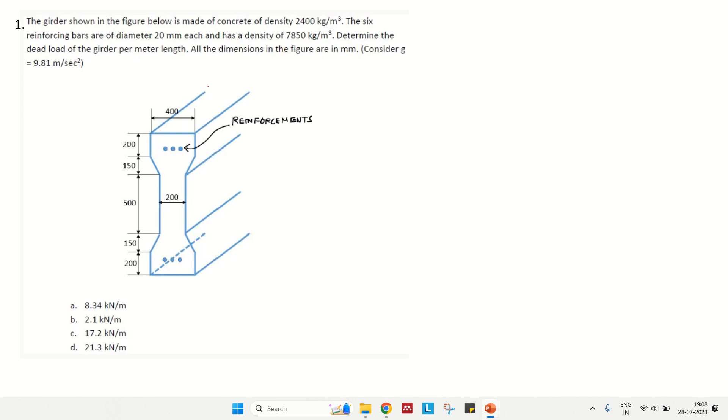We have a lot of loads, which we consider dead loads and live loads. One part of this is calculating what is the dead load applied. Dead load is obviously the self weight. One component is self weight, and another component is the load which permanently exists on the structure. Right now they are asking us to calculate the self weight of the beam.

The beam has six reinforcement bars, and it's an I section. So we just calculate the area multiplied by the unit length, since they are asking for per unit length. We'll calculate the area of this complete section, multiply it by 1. This is a basic level thing, so you can divide it into different parts, calculate the cross sectional area, multiply it with 1 meter, and volume multiplied by density will give the weight.

We also have two different components. One is the concrete, this is the concrete component, and we have the steel component. For the steel, they have defined what is the diameter of the bars.

Let us go ahead and start working on this. This rectangle part I'll mark it as 1. This trapezoidal part I'll mark it as 2. This complete rectangle part I'll mark it as 3, and this is 4, and this is 5.

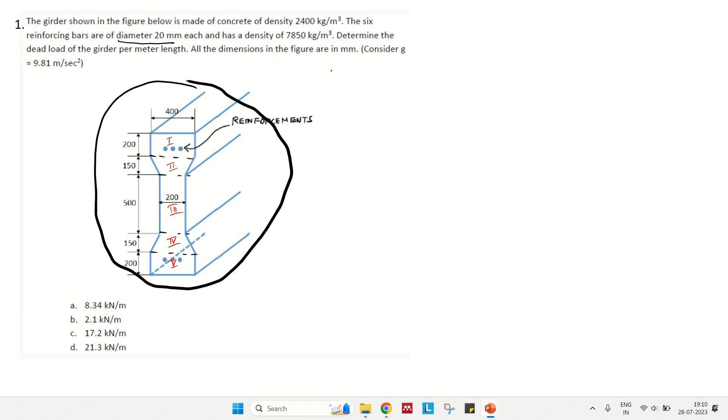Let us say the reinforcing bars, we can calculate the volume and then weight of the reinforcement bars. So let us calculate the dead load of the reinforcement bars. Can someone calculate the area and tell me what is the complete area of the reinforcement bars?

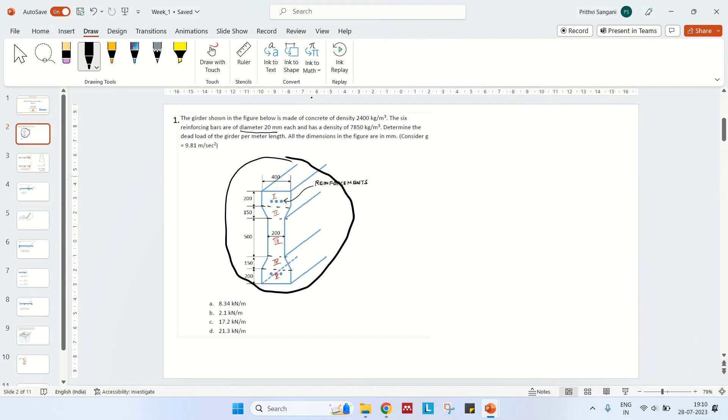How many bars do we have? We have 3 bars on the top, bottom reinforcement is 3, so we have 6 bars total. The area of cross section is pi by 4 into d square, and they're asking us to calculate per meter length. So let us say I'm taking it as 1000 mm. I want to calculate everything in terms of mm, then convert into the metric system: 6 into pi by 4 into 20 square into 1000.

This gives us the volume. If someone already calculated, they can tell me the value, if not I'll also calculate. Did anyone get the answer? This is what I got, can anyone confirm whether this is correct or not? Thank you, so this is the volume.

We need the weight, so weight is density of steel multiplied by volume. This is in mm cube, so now I'll convert into meter cube. 10 to the power how much? It's 10 to the power 9, because millimeters are 10 to the power minus 3 meters, and 10 to the power minus 3 whole to the power 3 gives 10 to the power minus 9. This multiplied by the density, which is given as 7850.

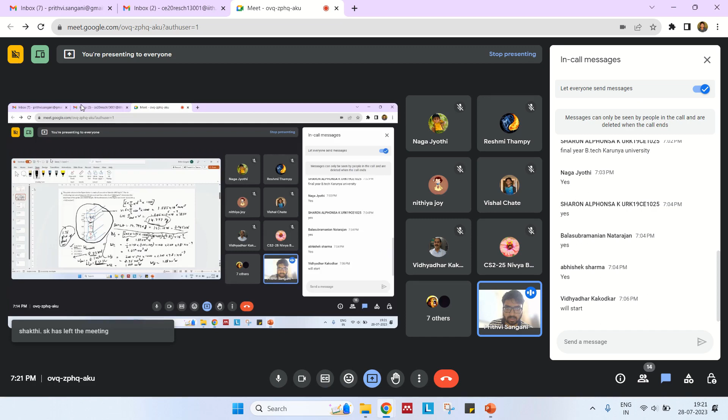So I hope the problem one is clear for all. You can just say yes, or you can message okay or yes, something like that. If you have some doubts, you can just tell me.

Can anyone respond, or shall we go to the next problem? Okay, yeah, thank you. Oh sure, thanks.

This is a basic one. I just took this problem to understand the different types of loads coming onto the structure. This is one part of a dead load. We also have live loads, wind loads, earthquake loads, snow loads, impact loading, and so on. This is the most common type when we design a structure. Dead loads - civil structures are usually heavily built, so dead loads make up a very high proportion of the total load.

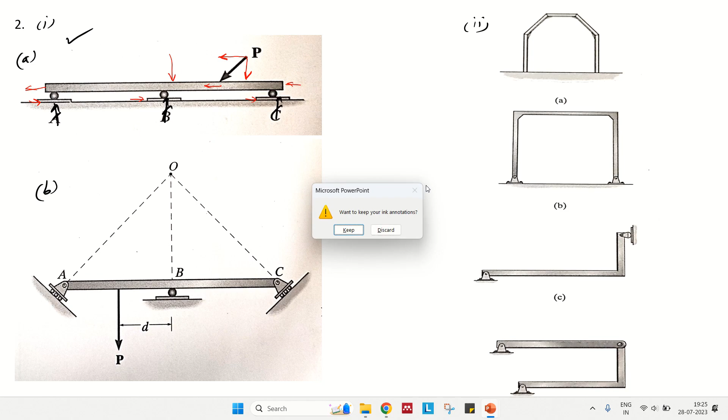But in this case, it is not like that, right? If you are loading in this direction, then it is fine. But what if you are not loading in that direction? If you're loading in the horizontal direction, then it is gone - someone just joined, sorry - so if you are loading in the horizontal direction, that means it just moves off. So this is an unstable system.

This is an unstable system. Now with this type of loading, you can see again this is a roller here - this is a roller support, again a roller support, and this is a roller support. So what does the roller support actually have? It can't move in this direction, so it will resist - you will have a resistant force coming here. It can't move in this direction, but in this direction it can move, though it can't move in the downward direction. So when you are restraining its movement or deformation in some direction, there you will have resistive forces - that is how the reactions generate. And for example, it can move in this direction, so if you just push it, it will just go in this direction.

You will not have any resistance coming from this direction. But if you are trying to push this in this direction, then you'll have a resistance. It will not move, and it will give some resistance, right? So now what I'll do is, we'll have this direction, this is the direction, and this is the other direction.

So what do you mean? For example, when do you call that the system is in equilibrium? We can call the system in equilibrium when we have forces balanced in all directions. Let us say x force is 0, forces in y direction 0, forces in z direction 0. For example, if the forces are not 0.

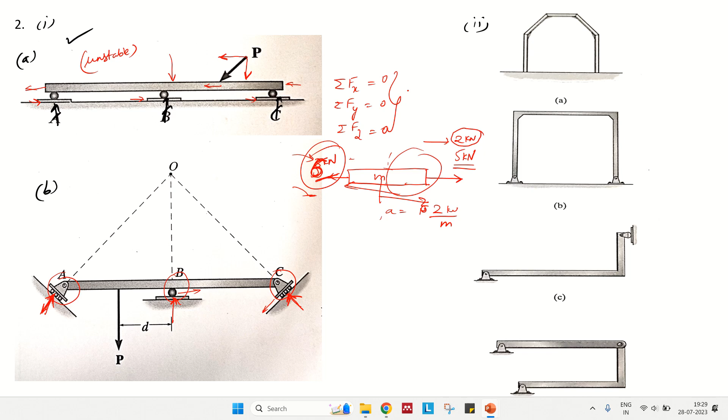In this, it is only about the summation of the forces being equal to 0. And also we should have the summation of moments equal to 0. So let us say why the summation of the moment should be 0.

Let us say I have a pen, or let us just take the fan itself - this is the wings of the fan. So I'm just pulling this, or rotating it in this direction. What happens? It will just keep rotating. It will keep rotating.

So what if I have a fixed support? I'll just hold this pen like this, and then do this. Now because of this fixity, it will not rotate, right? It will actually have some reaction coming here.

So for every system, you should always have this satisfying: summation of moments, and summation of forces, should be 0, irrespective of whatever you are doing, for the stable system - I'm talking about the stable system. So let us say this system has this vertical component, this inclined component, and this other inclined component. So I have some load passing like this, or maybe a point load somewhere here.

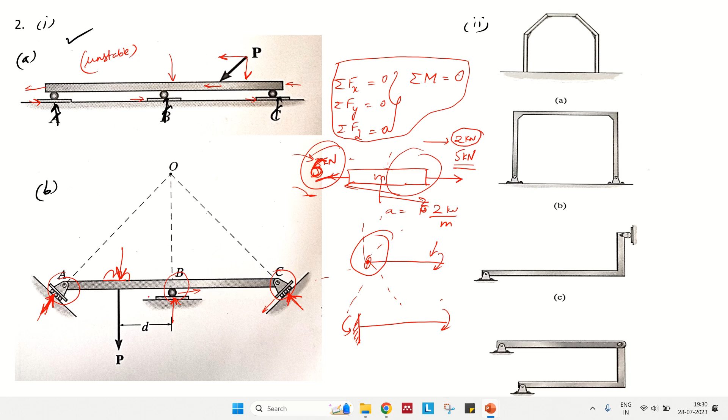So what I'll do is, irrespective of the position, usually we have a habit of taking moment about A0, moment about B0, or moment about C0. But that is for the easiness of our problems, right? So what I'll do is I'll take some moment where all these three intersect.

Let us take this point, okay? For the system, like I said, for the stable system, at any point you are considering all these things, summation of forces and summation of moments, that should be 0. So I'll take this random point, but that random point now seems to be an intersection where all these forces are concurrent - that means it is intersecting at that point. So let us say at this point, will our moments be 0?

Because of this load, let us say this is P load, I'll generate some reaction here R1, some reaction here R2, some reaction here R3. So at this point, what is the complete total moment? This R1 is going actually here, so there is no lever arm, right? So R1 into 0.

So here it is 0, R2 into 0, R3 into 0. But let us say my load here is P at a distance D from O. So you have P into D, summation of moments is equal to P into D plus R1 into 0 plus R2 into 0 plus R3 into 0. So that is PD. It is not equal to 0.

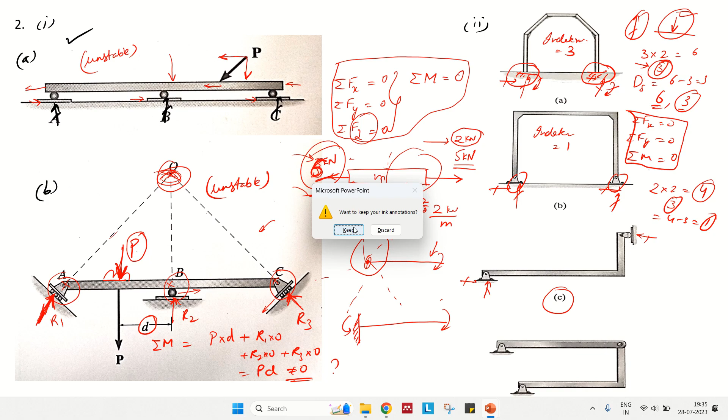Is this indeterminate or determinate? This one, see. Maybe someone can answer. Yeah, okay, I'll just explain, even I used to get confused about this.

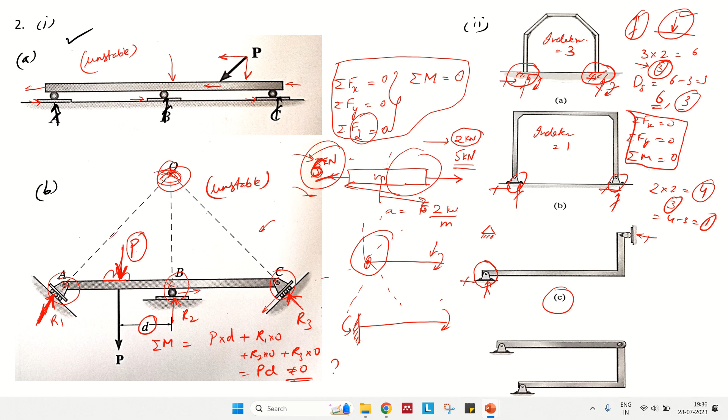So you can see this is actually a pin support. Okay, this is a pin. We usually represent a pin support like this. So this is similar, this is something which is similar. But here this is actually something different, this is actually a roller support. So this is what we usually denote it as.

So now you can say this is a roller support and this is a pin support. So we have 2 and we have 1, so we have 3 unknown reactions, and we have 3 equations. So degree of static determinacy is 3 minus 3, that is 0. So this is determinate.

Again, here you can see this is a pin support. You have a hinge here, and at the hinge there is a release, right? At the hinge we'll have an extra equation of equilibrium. So at the hinge, the total moments about the hinge is 0, because the hinge will only take the shear forces, not the moments.

So it is like this, for example, you can see here. Let us say this is my hinge. If you just give some load, it will keep rotating. That means it is not taking any moment - it is taking a force, but it is not taking bending moment, right? So this is how it is, and again this is a determinate structure.

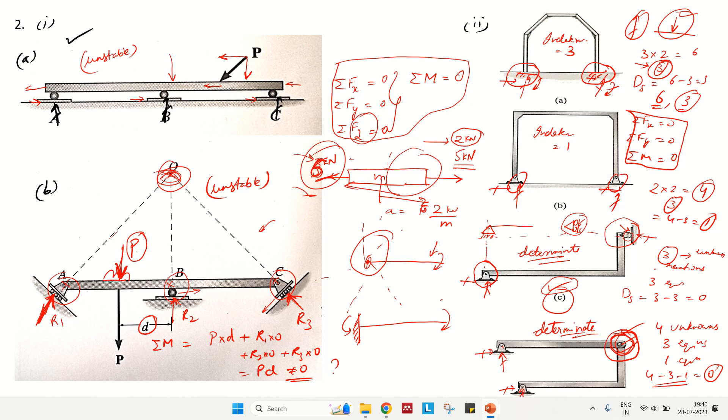So shall I go to the next one, or anyone have some clarity? Anyone have some doubts, or yeah? Shall I go for the next problem?

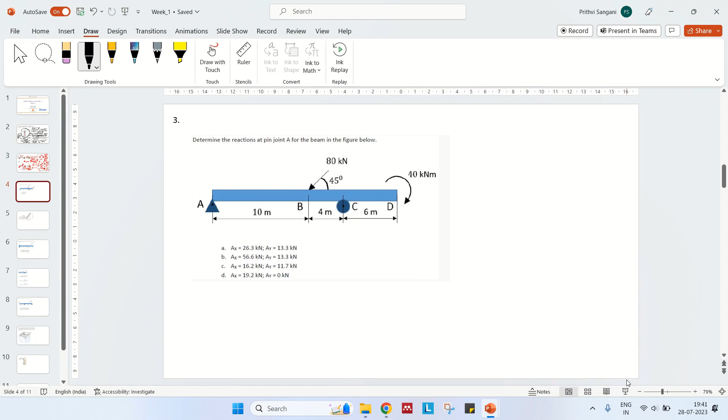So let us go to the next question. Again, this is how to determine the reaction forces on this structure. So this is a beam we already have. This is an inclined support - sorry, this is an inclined load which is acting on the beam. So this is a pin support, this is a roller support, and we are giving some bending moment on the end of the beam, and also we have some inclined load of 80 kilonewtons with inclination angle of about 45 degrees. So how can we go about this?

Before that, I just want to confirm - I just want to give some clarity about force versus shear force, moment versus bending moment. I think most of you know about these differences, but just for the sake of explanation, I'll tell you what the differences are.

So let us say, similarly, we have 5 kilonewton force acting in this direction, and let us say I have 3 kilonewton acting. So if someone asks you what is the stress generated, let us say the cross section area is A - what is the stress generated? Do you think there is some stress in this member? I think so, because you have an unbalanced force, right? So you have an unbalanced force, and at the same time you also have some forces which are acting inside, right?

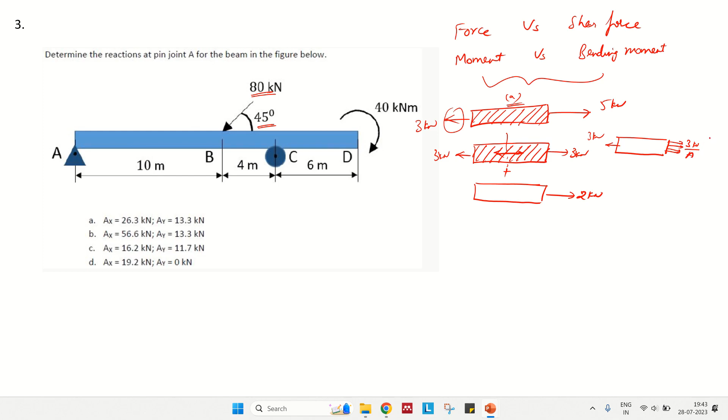So you can just divide this into 3 kilonewton and 2 kilonewton, like this. If this is 3 kilonewton and this is 3 kilonewton, that means you are stretching it, undergoing some stretch. So if you cut this section, what happens is that you are also pulling this 3 kilonewton. You have this 3 kilonewton divided by the area of cross section, and that gives you the internal stress.

So what is stress? Stress is the resistive force, the resistance divided by area, unit area. So only when you have the resistance coming from inside, when there is a resistance coming, then you'll have stress.

Pressure is actually again force by area. You are just applying some force on a particular area, you divide the applied force by that area, then you get pressure. But stress is actually the resistance offered inside the body or inside the material.

Similarly for force, you can say some force is acting on it, but shear force is actually a resistance offered because of that force. So that is the shear force.

And when it comes to moment, you are simply applying some moment. Let us say I'm applying again, same thing: you have a block, or a ruler or some scale, and you are applying some moment like this, trying to rotate it in this fashion.

So what happens if it's just placed on the table? It will just keep rotating, there's nothing happening, nothing to actually stop it, it keeps rotating. But when you actually clamp this somewhere and I'm trying to rotate this, like this.

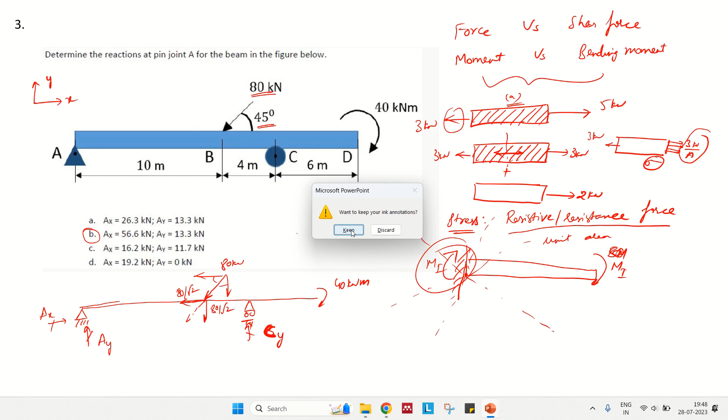Okay, I'll just do this for the sake of others.

80 by root 2. How much is 80 by root 2? Yeah, so this is 56.6 kilonewtons.

Let us just clarify what is in the X direction. So we have three equations of equilibrium. First one is sigma fx is equal to 0. Second equation is sigma fy is equal to 0. Third one is moment is equal to 0.

In the fx direction, let us take right side as positive and top as positive. So ax is in positive direction, minus we have 80 by root 2, and that's it, equals 0.

So ax is 56.6 kilonewton. So how do you find ay?

What I'll do is I'll just take moment about this point, right? So I'll take just moment about this point. Why do we take moment about this point? Because I don't know cy.

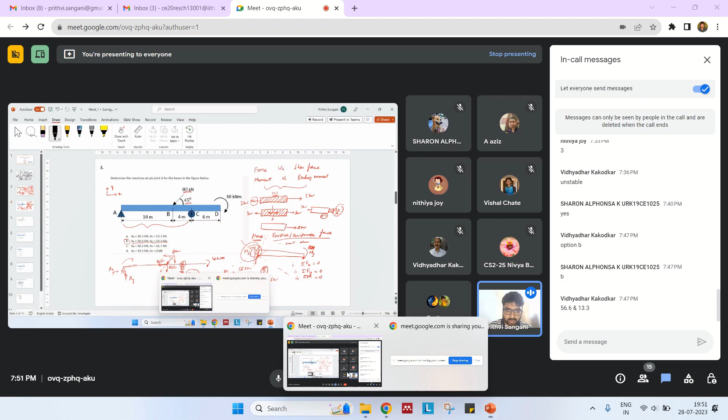Yeah, I think everyone is getting this answer, B. Anyone has any doubt, any clarification on this, or any clarification on bending moment or moment differences and force and shear force difference? Is it fine? Shall I go to the next problem?

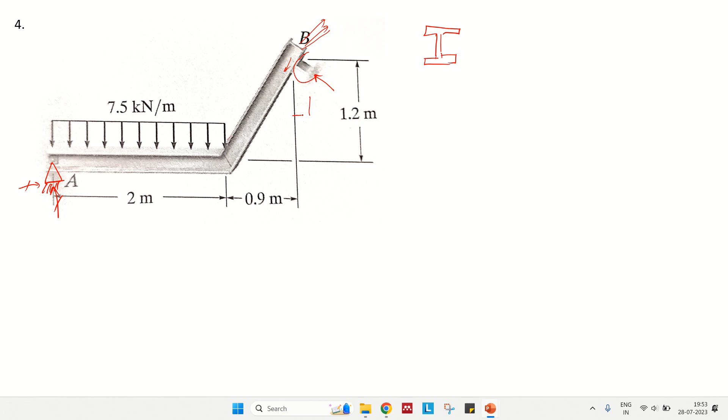It's already given here. So this height is 1.2, and this is 0.9. So it is something like this. This is 1.2 and this is 0.9, right? So this is like 3, yeah, this is 3, this is 4, and this is 5, something like that.

So meanwhile you can also keep finding out what is the reaction. I'll also try to find out. Okay, so I'm just drawing the line diagram of this. So the beam is something like this.

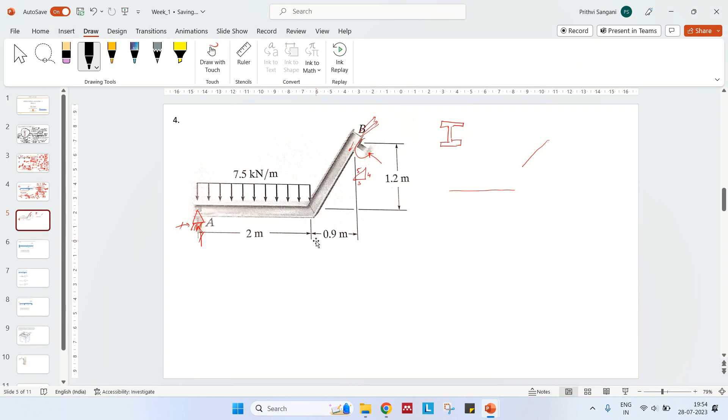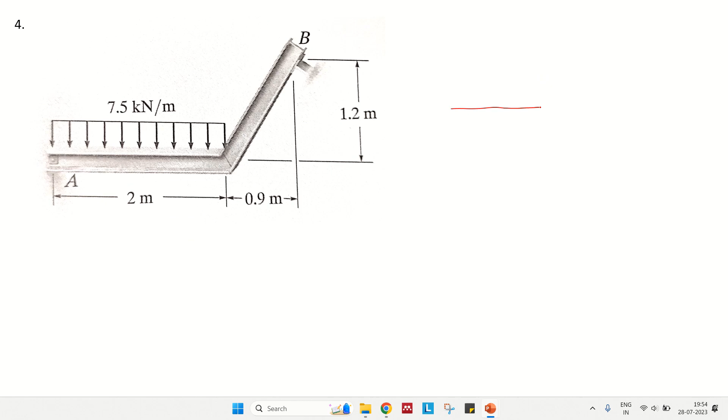Yeah, okay. So I have a beam something like this, and it is inclined in this direction. So this is my pin support, and this is my roller support. Okay, so if I just remove the supports, and then if I just draw the reaction force, it becomes a free body diagram, right?

And I also have a uniform UDL. So usually this is easy to draw, so that's why I'm just representing the UDL as something like this. So this is 7.5 kilonewton per meter, and this is B, and this is A. Okay, so how do you find the components of this? The components will be something like this.

So let us say this is bx and by, the components — I'm just writing this for the sake of calculating all the moments. This is one component and this is another component of the same thing, by and bx. So maybe you can work out and tell me; meanwhile I'll keep working this out.

So what shall we do first? Let us just initially... you can follow whatever you want. So let us say I have sigma fx equal to 0, sigma fy equal to 0, and also the moment about that should be 0. Sigma fx, the summation of forces in x direction to be 0, then let us say this is ax, this is ay, and you have the same thing bx and by. So we have a lot of stuff.

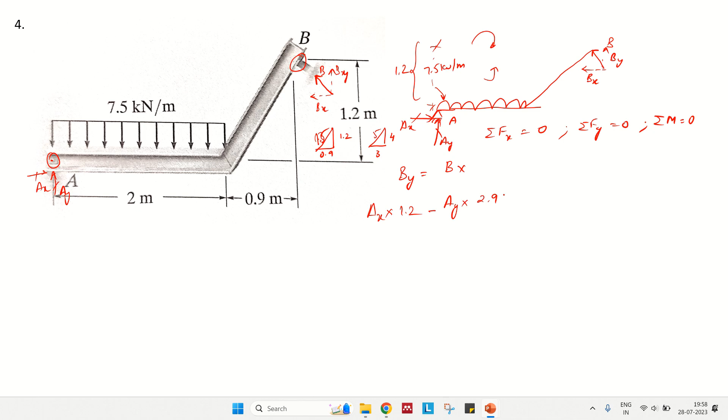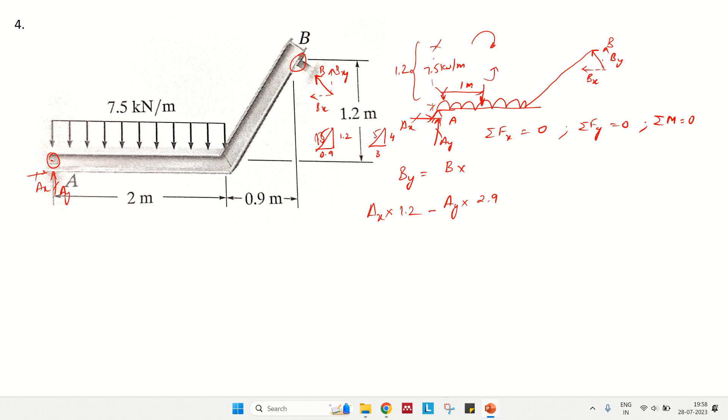So ay into, let us say, 2.9. And what about the load? 7.5 kilonewtons is acting in this direction, and where is the centroid of the load acting? That is 1 meter from the left support. So let us say, what is the total load acting? Minus 7.5 into 2 is the total load. Into what is the lever arm? If this is 1, the total is 2.9, it is 1.9.

This is equal to 0. This is equation 1. Sure, definitely, yeah, sure. So you have a horizontal support at this point, right? You have a horizontal support reaction coming from support A, and you have a vertical support reaction coming from support A.

So what happens is, let us say I'm just drawing a horizontal line from support B, and I am just drawing a vertical line from support B. So what do we know about support B? At support B, the moment should be zero because it is a roller. It can rotate here. The rotation about this point should be zero because it can't take any bending moment.

That's what I mean, right? It can't take any bending moment. So the summation of moments at this point should be zero. So due to the reactions at B, let us say I have a reaction force coming at B. So B, the reactions are passing through B, right? Just a second, someone joined, I think.

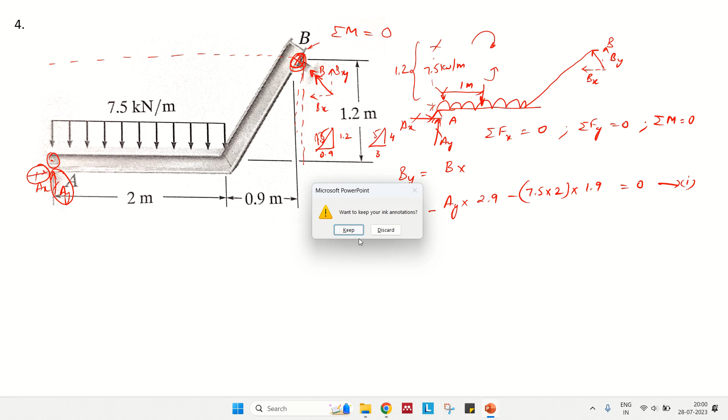So when the reaction force is actually going through point B, there is no... what is moment? Moment is force times distance, right? So you have force, but distance is zero there because it is passing through that point itself. So there is no moment acting on it. That's why the reaction force at B times the distance is zero there, so that's why I didn't consider it in this equation. Okay, that is clear, I think.

So now when it comes to the other forces, what are the other forces I have? One is the load coming.

This is the load coming onto the beam, and the reactions on the beam. The reactions at support A: I have a horizontal reaction coming at support A, and also a vertical reaction. So at this support I have one force in this direction.

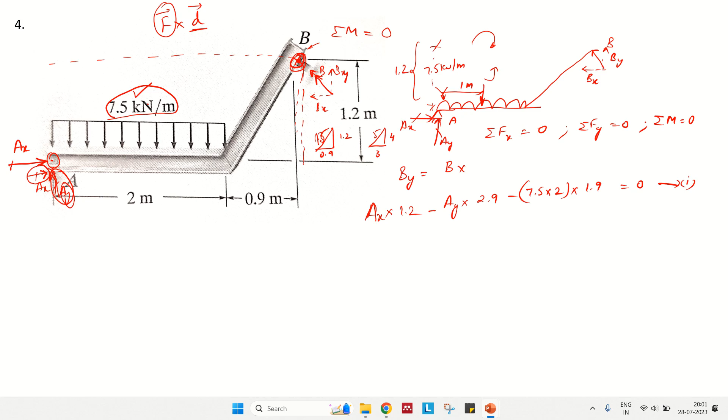This is AX, the force. If I want to find the moment, how do I find it? Force times the lever arm. The lever arm is the perpendicular distance. So what is this distance? This distance is 1.2, so AX times 1.2. And how is this acting? It is acting in this direction.

F cross D is a vector notation, so F cross D acts in the anti-clockwise direction. In this example I'm taking anti-clockwise as positive, so we need to be consistent. So AX cross 1.2 - this is due to the horizontal movement, and we have a vertical support.

This is support reaction AY. Again, what is the perpendicular distance? This is the perpendicular distance, which is 2.9, and again this is the force, and this is the displacement, acting in this direction. So that's why I have written AY into 2.9.

Now let us come to this UDL. The UDL is acting over a length of about 2 meters, and the UDL is about 7.5 kilonewton per meter. Initially, for these things it is just a point load with the load coming and the distance D. But for the UDL, you first need to find the resultant load.

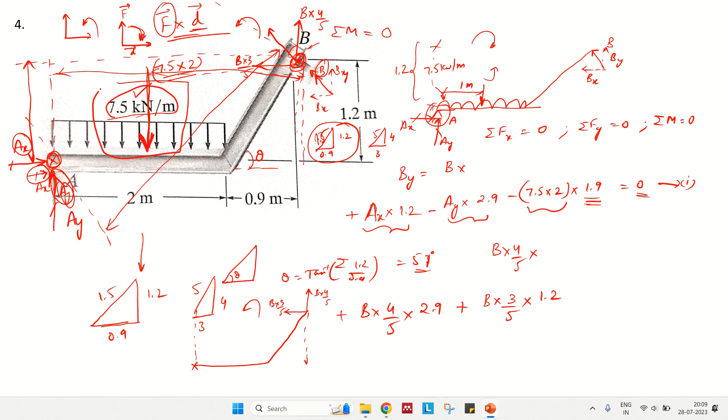7.5 kilonewton per meter, again that is 7.5 times 2, that is the resultant force is 15 kilonewton, which is acting 1 meter from the support A. So what is this doing? What should I write for that? Is it minus or plus? Yeah, correct, yeah, so this is 15 times 1.

So that is 0. So can anybody find what is B quickly? I mean in this equation the only unknown is B. So what is B? 4 divided by 5.

How much is it? I'm getting something around 4.93. Can someone confirm whether it's correct or not? Okay, thank you. So everybody's getting that answer, right? And everybody's able to follow it, right, the notations and all?

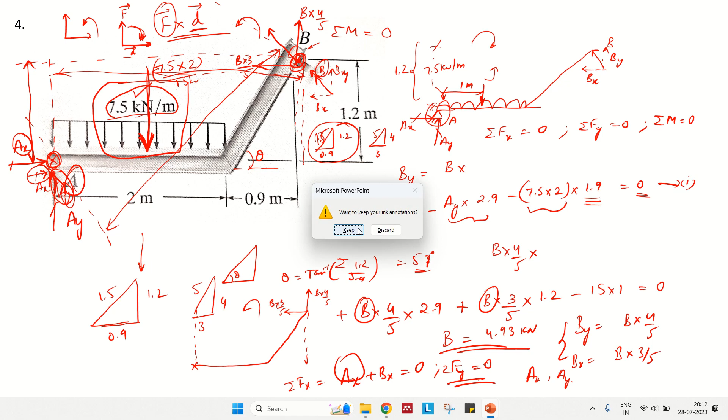Shall I solve that, or you can solve ax and ay? I can solve, actually, you can tell me if you want me to solve it. I can solve it, because we are still in... It's fine, okay, yeah, okay, thank you.

So B, you got it. Ax and ay you can just find out by a force equilibrium, right? Now coming to the next question.

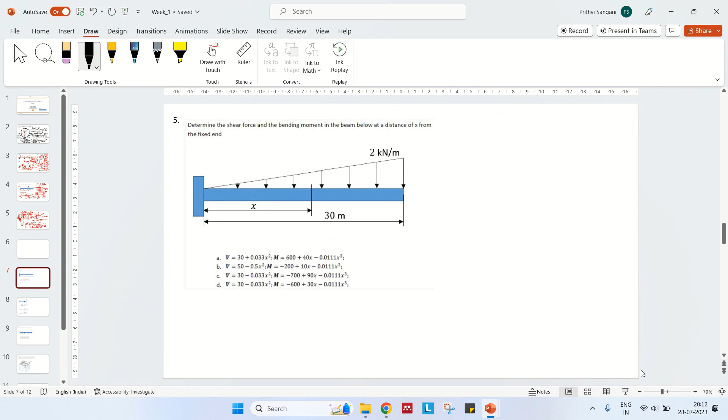Yeah, you can see this question. In this question, what is asked is: determine the shear force and the bending moment in the beam below at a distance of x from the fixed end. So this is the fixed end. Let us just draw the line diagram of this fixed end. This is how usually we denote the fixed end, and this is the triangular load.

So this is 2 kilonewton per meter. Here it's obviously triangular, right? It obviously means that it is 0 here, and it linearly increased to 2 kilonewton per meter, and this is a very big cantilever. 30 meters is huge, you just imagine how big it is. So usually we use this kind of cantilevers.

You can see that in the balconies, and in canopy structures, or you can also find this kind of things in parking lots. So 30 meters is like very huge actually. So you have to maybe the design should be very rigorous for this. We will have a very huge section coming from this.

Okay, so let us calculate what is the shear force and bending moment. So it is asking me to actually draw the shear force diagram and bending moment diagram. That's what the question is.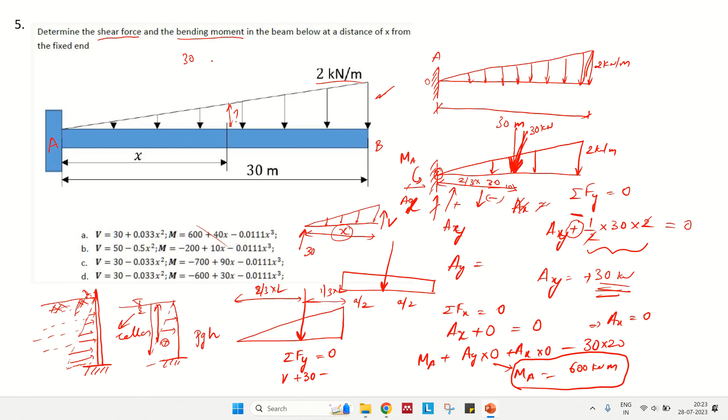So what is sigma Fy? V positive plus 30 is positive minus, what is the resultant of this triangular area? So if it is X, for 30 meters, this is 2. For X, how much is this? So let us say for 30, you'll have this is 2. So what is the slope? You have slope is 2 by 30, that is 1 by 15. So 1 by 15 times X.

Okay, is it fine? Is it clear? So this will be 1 by 15 times X. Let us just substitute and check. What if X is 30? For X equal to 30, it is 2. That's what it is. So what is the area? Half times 1 by 15 times X into X.

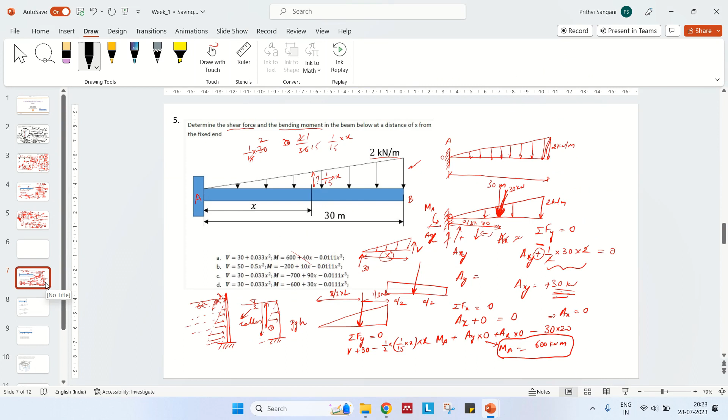Fine. So what is V? I'll just write down in the next slide. So V plus 30 minus 1 by 2 times 1 by 15 times X into X. I hope this is what I've written. V plus 30 minus 1 by 2 times 1 by 15 times X into X. How much is this? V plus 30 minus X square by 30. Can anyone solve this and tell me?

1 by 30 is like 0.03, yeah. V plus, that is V plus, yeah, that should be equal to 0 because sigma Fy is equal to 0. V plus 30 minus 0.03 x square is equal to 0. That implies V is equal to minus 30 plus 0.033 x square.

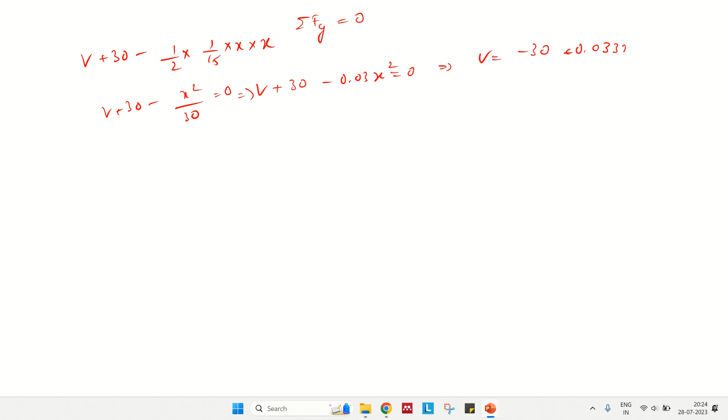Minus 30, plus 0.033 x square. So what we have assumed is V in the positive direction. What if the V is in the other direction? If we assume V positive in this direction, then we'll have a reverse of the symbols. This would be 30 minus 0.033 x square.

One thing you always keep in mind is which one is matching. Let us consider this equation itself: V is equal to minus 30 plus 0.033 x square. This is what we got. Let us stick on to this. Due to the shear force, we have considered it as minus 30, and due to the load it is 0.033 x square. So you always mention what you have actually represented. In this you have represented positive as the top. If it is upwards you have taken it as positive. If it is downward, you have taken it as negative.

Now you see here, in these equations it is 30 minus, so you have this thing. I hope you are able to understand. If you are taking V as negative, you will get 30 minus 0.033 x square. Okay, let us say it is a shear force equation. What about the bending moment equation?

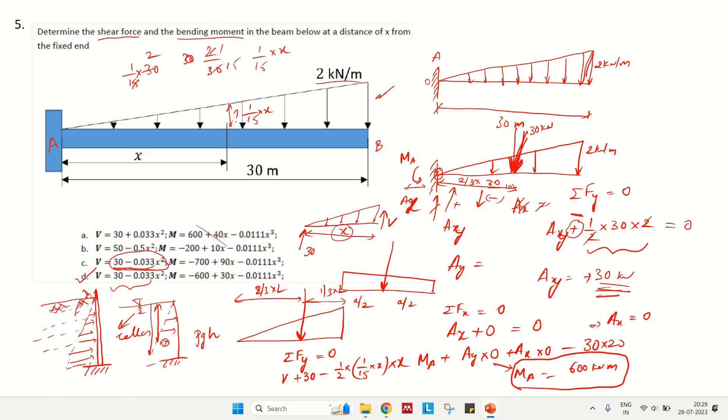Okay, this is Mx. So let us just clarify: minus 600 plus 30x minus 0.011 x cube. So what is the right answer? This is the right answer. Okay, any doubts in this? You want some clarification?

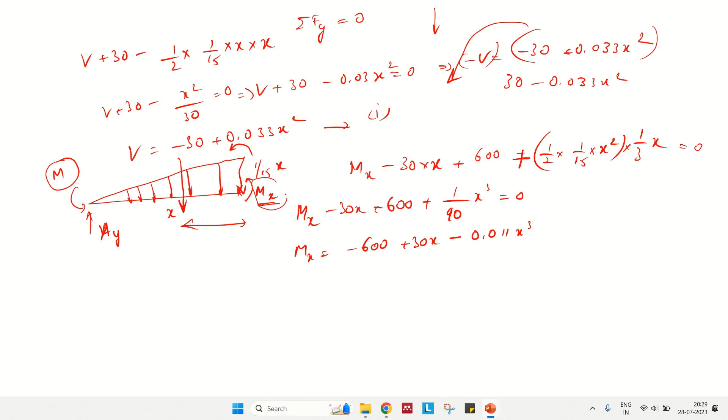One addition I want to tell you is why do we need to calculate Mx. Mx is actually unknown. So what happens is if you want to design something, let us say you want to design a beam, maybe the beam lying right above where you are sitting. If you want to design that beam, you want to know what is the bending moment coming, what is the shear force coming, and if you have torsion, you want to find that out too, because these are the inputs for your design. So structural analysis gives you the inputs you want for the design. You analyze it and find out the maximum bending moment demand, the maximum shear force, the maximum torsion. From that you usually find out the sections required for the beam - what should be the size, what should be the quantity of steel required, and so on and so forth.

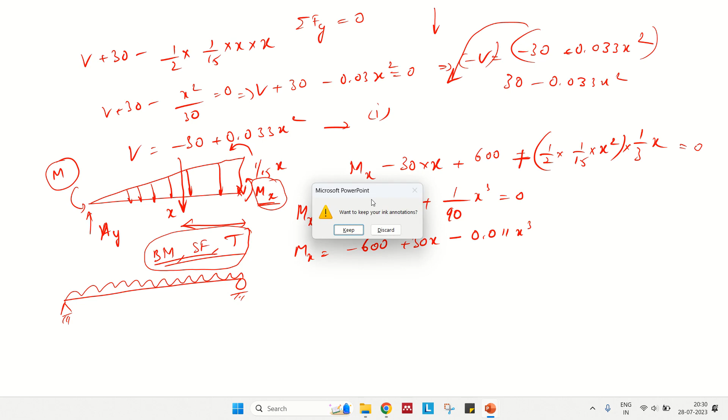So I hope this is clear. This problem is clear, right? Is it fine? Are you able to understand this? Okay, so let us just go to the next one. Let me check if I have any interesting questions.

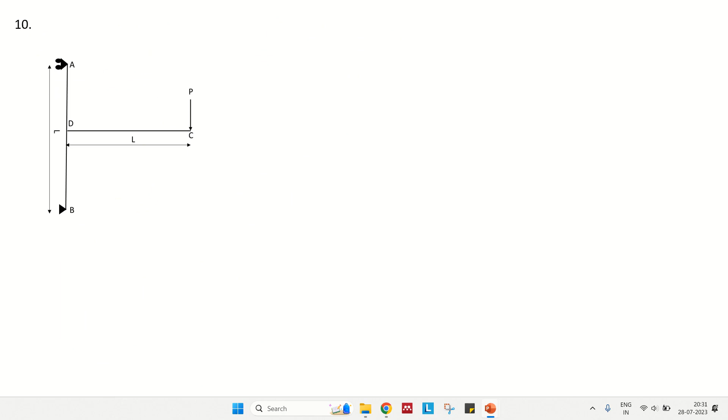Let us solve this frame first. So this is the frame, okay.

You have supports at two different y levels, and you have a beam. You also have a column, which is a vertical member, right? So usually columns are the vertical members. So we have a column and also we have a beam.

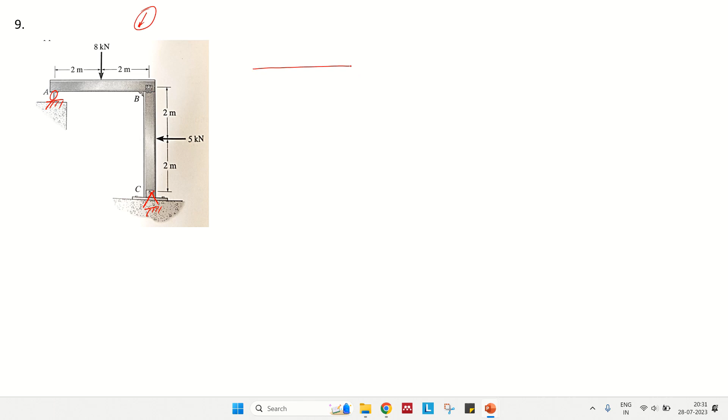Like I said before, this is again a roller support, okay, and this is a pin support. Right now you don't need to worry about how to define these supports. In the question it's always written, whether it's a roller support or a pin support. So I'm just trying to draw it.

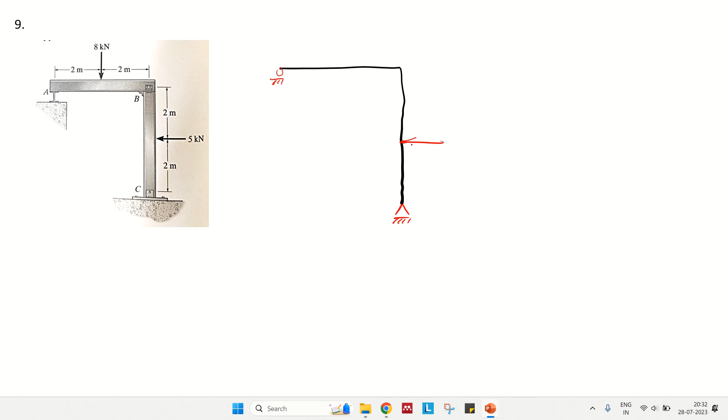So we have a roller support here, okay, and we have a pin support here. We have 5 kilonewton load acting at this place, and 8 kilonewton load acting at this place. This is already named A, this is B, and this is C. So maybe you just keep this in mind.

Usually for an I beam, right, you know the I sections. Maybe you might have seen a lot of I sections in steel structures. Let us say this is a steel structure. So for a steel structure, when you are making any connection, only the web gets connected.

See, this is called the web. This is web, and these are called flanges. Let us say this is the top flange and this is the bottom flange.

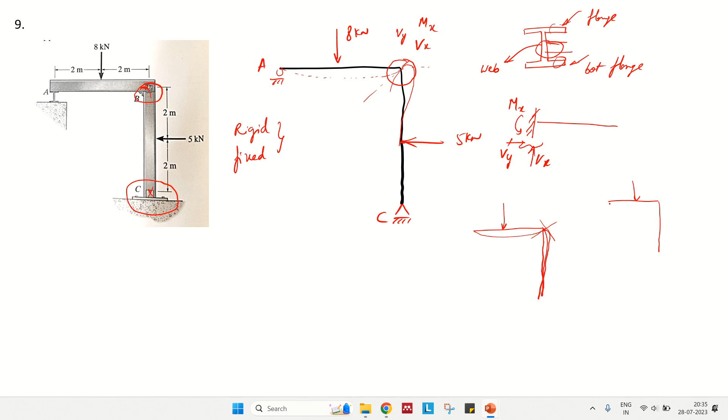Let us say, how does it deform? It will deform something like this, and the perpendicular direction is this. So it actually deforms in this direction, something like this, and this beam deforms in this direction.

So this is the original beam and column, and this is the deformed shape. I'm just drawing it a little thicker. What I mean to say is, for the rigid joint, it will also try to maintain that 90-degree initial angle it has after the deformation.

But for the fixed support, it's not like that. It is fixed always, it will not move.

It will always bend like this, it will be zero all the time. So that is the difference between rigid support. Rigid is actually rigidity - you have beam and column joining, it's called a rigid joint. Basically it's a joint. We'll call it a rigid joint and fixed support. So now...

You can calculate now. So this is AY, this is CY, and this is CX. Let us take moments about C as zero, because you have two unknowns here. So can anyone quickly calculate what is AY? AY times 4, minus 8 times 2, minus 5 times 2, is equal to 0. AY, how much is this?

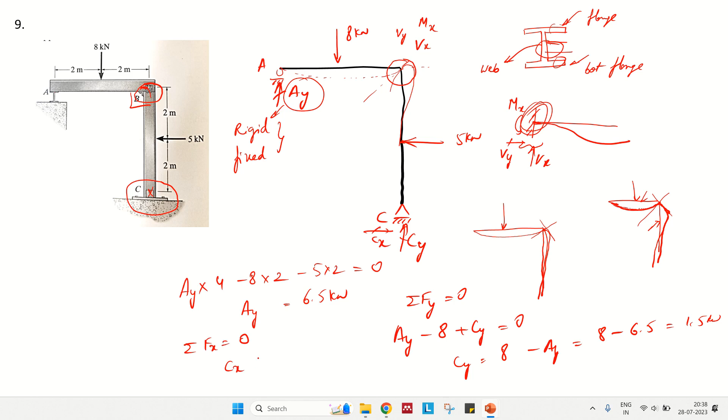How do you find CX? CX is very easy. Sigma Fx is equal to 0. Let us take rightward as positive. CX, what loads do I have? Yeah, I have minus 5, minus 5 is in the left direction, is equal to 0. CX is 5 kilonewtons. So you already have the support reactions coming, right?

So CX and CY and AY, you have it. So once you have the support reactions, you can now draw a free body diagram, FBD. So this is 6.5, this is 8. Everything is actually in kilonewtons. This is 5, this is 1.5, and this is 5. Okay, is it fine?

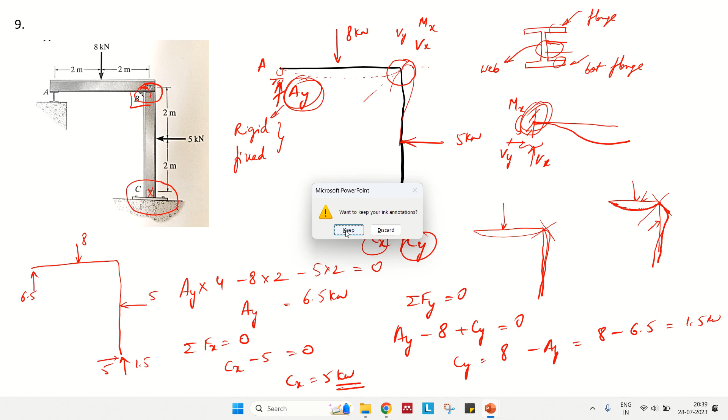Can you draw the bending moment diagram for this? Shall we draw the bending moment diagram for this? Yeah, let us draw the bending moment diagram for this. Okay.

So now what I'll do is take those things separately. We have beams - beams are actually horizontal members, right? Usually we have horizontal members, those are called beams. The vertical members, those are the columns. For the beams, the majority of the loads are bending moments. For the columns, in addition to bending moments, we'll also have significant axial loads acting, axial forces acting.

Okay, so this is 6.5 if I'm not wrong, 6.5, and this is 8. So now I have removed this support, that means I need to balance the forces. So this should be 1.5, right? And what is the moment? So this is 6.5 times...

So you also have a moment generated because of this. So this is 6.5 times this 4, 6.5 times 4 minus 8 times 2, minus 8 times... this is 10. So this is in this direction, it should be resistant. So this is 10 kilonewton meter.

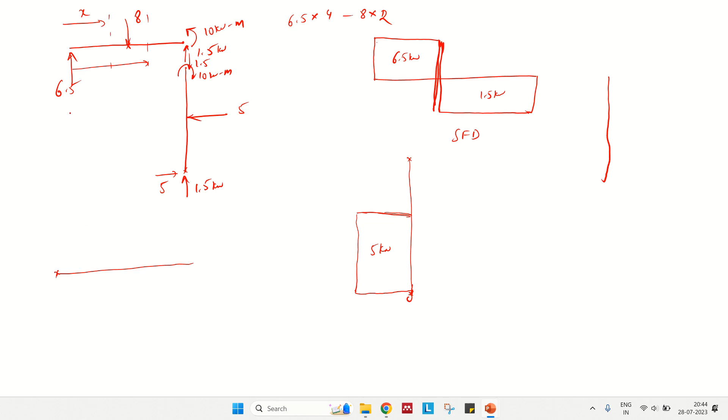And what about the bending moment? Let us say at this point the bending moment is 0 because that's a roller support. So what about in x? It is 6.5 times x. So this point is 6.5 times 2. This is 2, right? This is 6.5 and this is 2. So 6.5 times 2 is 13. So the bending moment here is 13.

It is linearly varying because at this point it is 6.5 times x. So it is something like y is equal to mx, a linear curve. So at this point it is 6.5 times x, and how much is this? This is 13.

Now what about the bending moment at this point? It is about 10 kilonewton meter. Is it positive or negative? So we have 6.5 times x, which is 4 minus 8 times 2. Let us say this is mx. How much is this? 6.5 times, that is 10. That is what it is. So here it should be 10.

If this is 13 kilonewton meter, this is 10 kilonewton meter. Similarly for the column also. So you have 10 and here it is 0. That means you have 10 constant up to some point, and then it will be 0 here. This is 10 kilonewton meter, this is 10 kilonewton meter. So you have constant bending moment at this point, and it is 0 here.

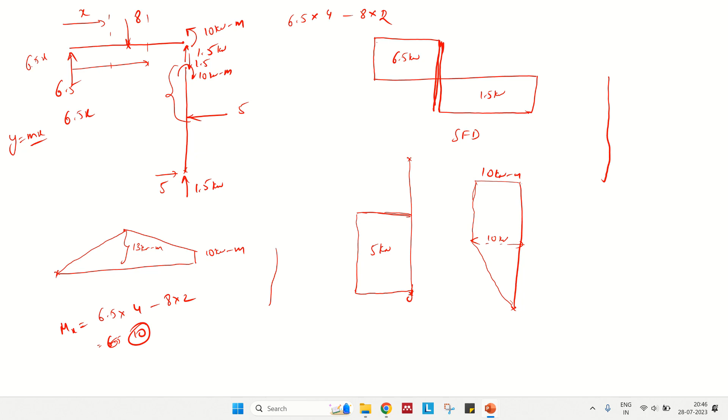Is it fine, or is it? Are you able to follow this? Yeah, okay.

So this is about the bending moment diagrams.

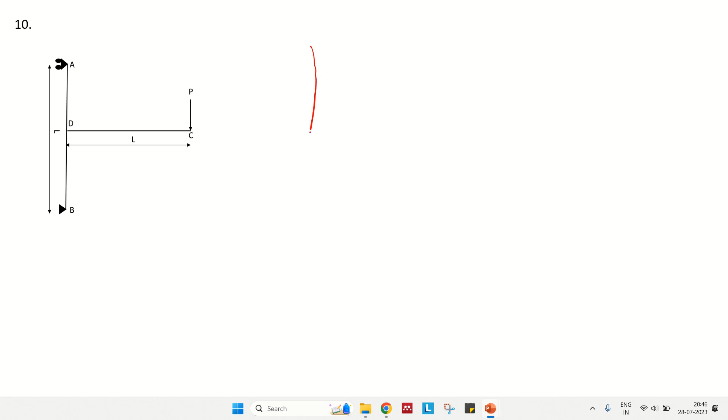Will you draw the bending moment? This is again a very simple problem. So let us just draw the bending moment diagram and shear force diagram for this. I don't know why I'm not able to draw straight lines.

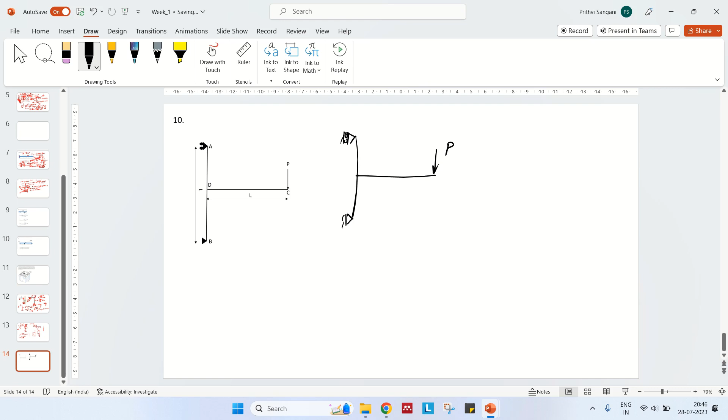So this is P. If this is P, let us solve this problem. You don't have any reaction here except this, let us say this is AX. There is no AY because it's a roller support. So there is no, you'll have BX and this is BY. BY is actually equal to P because you should have force equilibrium in the y direction. This is P, yeah, that is fine.

So what about the other reaction? How do you find AX? AX will again be a question. So let us take the moment about A equal to 0. Bx times L, this is in this direction, Bx is rotating A in the anticlockwise direction, I'll take it as positive. Plus By times 0, since By is passing through A there is no lever arm, so it is 0 again.

And this is rotating in the clockwise direction, so minus P times L is equal to 0. So Bx is equal to P, that's what it is. So when Bx is equal to P, Ax will be in this direction, it is P, because the force in the x direction should be 0.

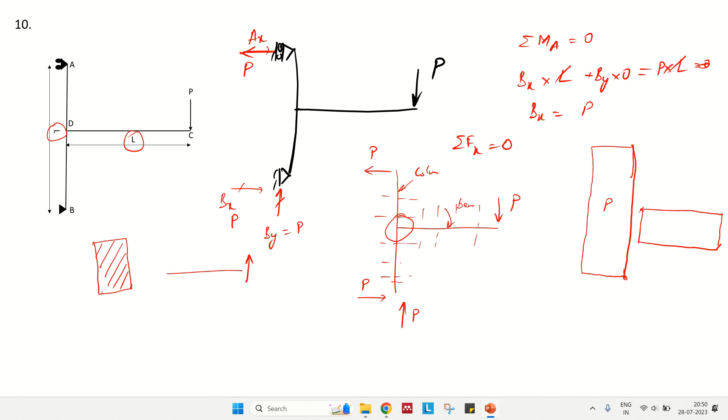So now the question is, at this location what's happening? Shear force, usually you know that, right? Let us say that beam is having a cross section of this. This is a cross section of the beam. Usually the shear force is in this direction, you always take in this direction, so the vertical direction usually. This is how the shear force is acting in the vertical direction. So we are actually finding out the tangential to the cross section area. That is what the shear force here is.

So when it comes to the bending moment, this is column, this is beam. When it comes to the bending moment for the column, at point A, that is a roller support, the bending moment is 0. What about subsequent points? It is actually rotating in this direction, so P times X, P times X, but now you need to be very careful.

So let us say this is a beam. First let us talk about the beam. So you have P coming here, and this is a column. That is why I actually asked you to draw these free body diagrams. So you have P here, you have P here, and this is P here. If you remove, you just bifurcate, or you just break down this complete frame as a column and a beam, it should have reaction coming from here.

This is P, and if this is P, this is PL, right? So this is rotating in this direction, the reaction will be in this direction. So this is PL. So you will again have a reaction coming in this direction, and you will also have P coming in this direction.

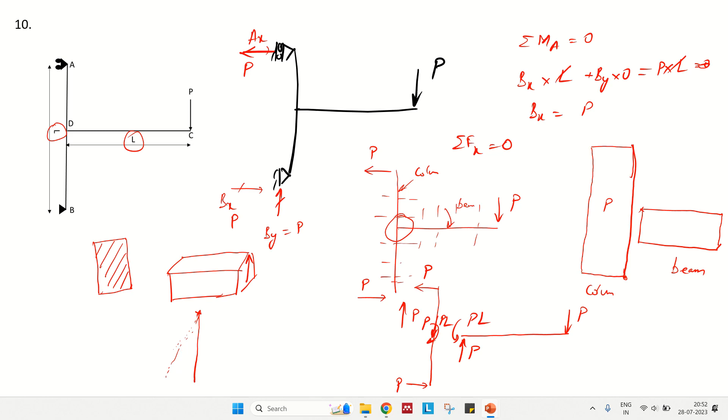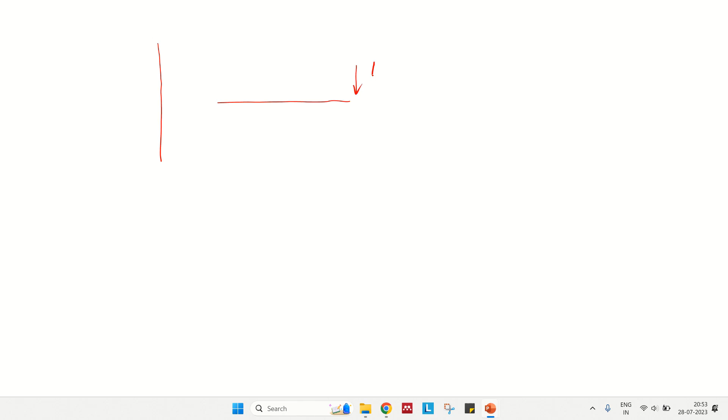Sorry, I'll draw it in another way. So what I mean to say is, let us say this is the column, this is the beam. You have P load coming here, so you'll also have a reaction P here. If this is P and this is length L, you'll have a reaction moment, or the bending moment as PL.

And the same PL you'll have in opposite direction here, because at the joint the sum of the moment should be 0, right? So it's not the sum of the moment, it's actually the reaction, right? You have an action, the reaction should be the same. So it's PL, and this is in the downwards direction, upwards, and this is downwards, and you have P in this direction and you have P in this direction.

So let us say this is A and this is B. So let us draw the bending moment of A and B. So at this, up to L by 2, this is L by 2, this is L by 2. So up to L by 2, it is actually linearly varying, P into L by 2.

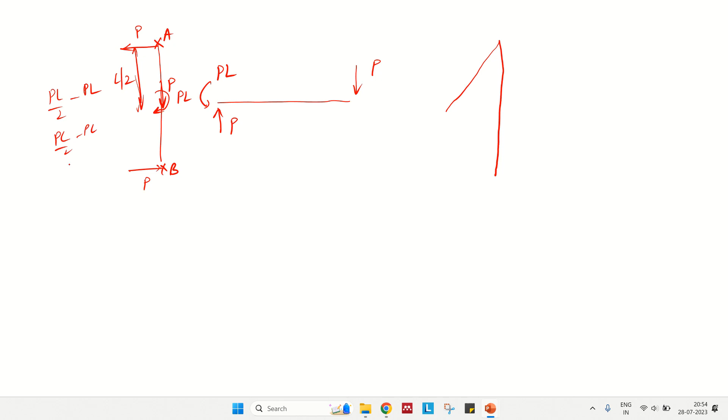After L by 2, you have in this direction, and this is in this. So P into L by 2 minus, you have PL. Right, so PL by 2 minus PL, that is minus PL by 2, so you have a sudden jump here of PL. So this is PL by 2, and this is minus PL by 2.

And from here onwards, what happens is that again it keeps going in a linear fashion, and it will be 0 here, because this support is a pin support, B support is a pin support. So now what's happening in the beam, that is what we also require. So at this place it is 0 because P into, there is no lever arm here. So as we go here, the lever arm is increasing, at the same time the bending moment is also increasing, so it is linear. This is PL.

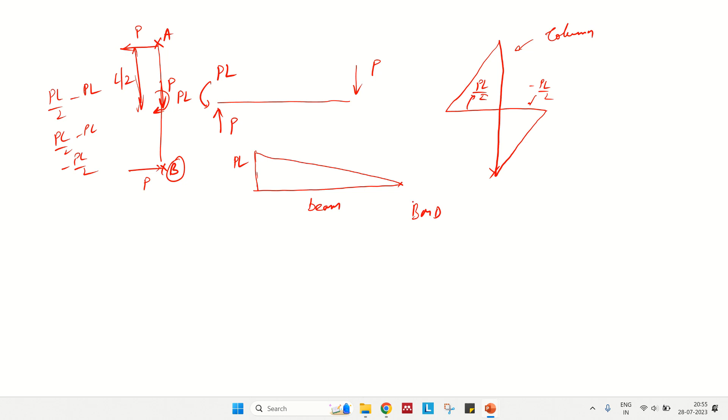So this is for the column, this is for the beam. So bending moment diagram. So is this clear? Are you able to follow this bending moment diagram?

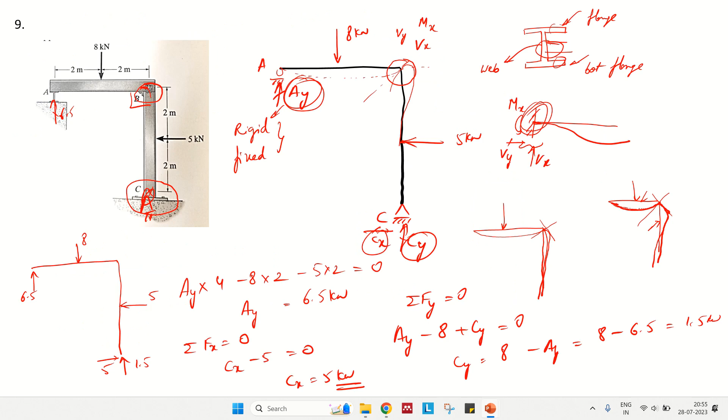So there are a few more questions. I'll note it down and you can try this. I think only one is left. This question is almost the same as we have done, similar to this question.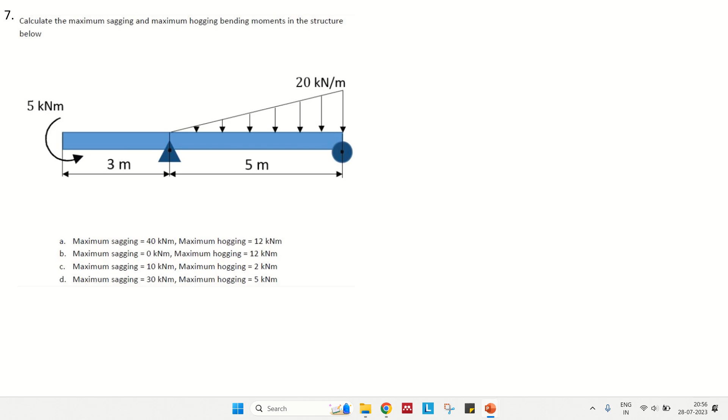Okay, can you try this, or shall I? Because it's already 8:56, so I don't think I can finish this question. So can you try this, or shall I give some clues, or you can try this question? Can someone respond? Sure, sure. Yeah, you can tell me.

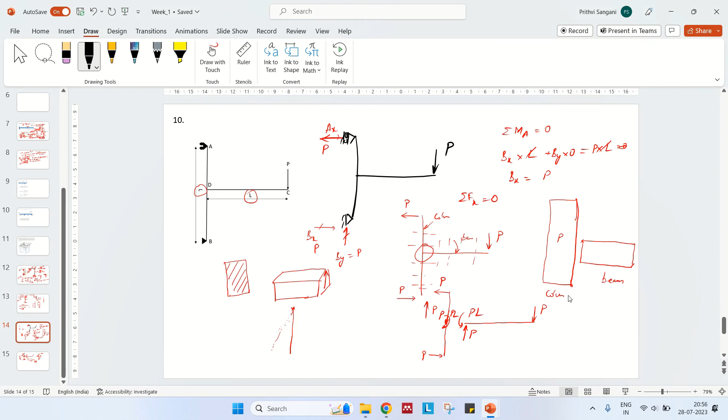So right now I'm not concerned about which is the tension side and which is the compression side, because that we can say when we are actually defining what is sagging and what is hogging.

So for the column, usually, like you said, it is about the tension side. So you can see this is how let us say this is my beam. So how is this, when I'm applying P load in this way, how does the beam bend? It will bend in this direction, and this part will be going in this direction.

You're able to follow this deformation profile or deformation diagram? If I'm bending, see, you have this, and is it in this direction? So I have load coming in this direction, and this will be in this direction. So yeah, you're right, this is in this direction and this is in this direction. This is what you are mentioning, right?

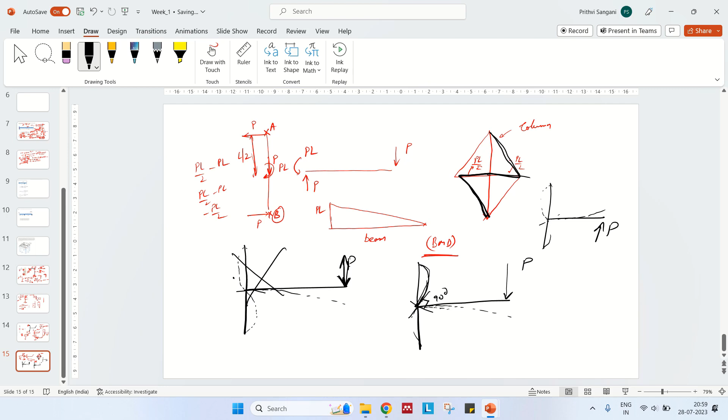Yeah, yeah. Point of, sorry.

But we also have AX coming here, right? You can see we have AX. So when we have AX times D, and also we have 7.5 times, let us say we have this thing, 7.5 times 2 into D. So this we can make it zero. This can be zero.

Are you able to follow this?

Yes, you're right. That's what initially I was also mentioning, that instead you can directly take this, like you said, if you know this D, the lever arm. Yeah, we can directly do that also. D into this length, if you know that length as per the geometry, yes, you can definitely do that. So this length you can actually find out, right? Like for example, you just take like this, and this will be something like this, so you can find this length with the geometry.

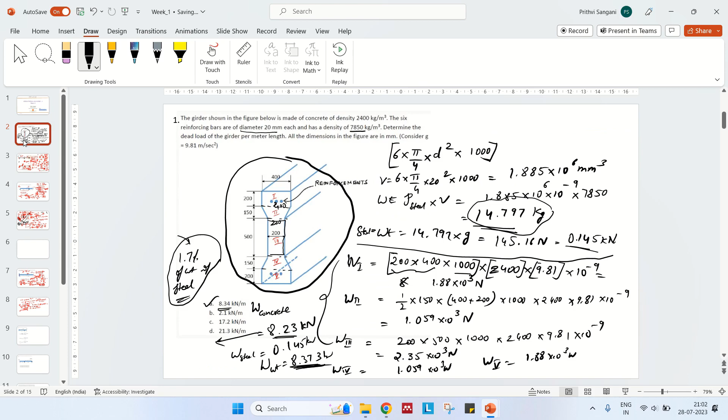Okay, so let us go by the mechanics. Let me take a new page.

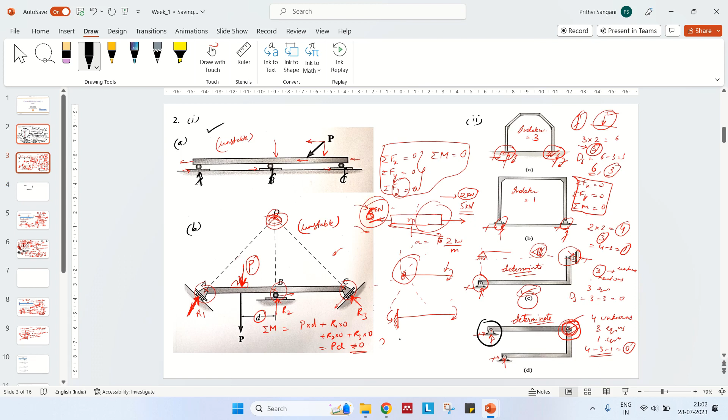This is how it is, right? So let us say, what reactions will I be getting? This is Ay and this is Ax. And here I'll have By and this is Bx. These are the reaction forces.

Let me apply a horizontal force here. Let us go with the mechanics itself, only the mechanics. If I apply a horizontal force, now how do we solve this?

So we have four unknown forces, four unknowns: Ax, Ay, Bx, By. We have three equations of equilibrium, and also we have one extra equation, so four unknowns need four equations to solve.

So we have three equations. Let us write it as Ax plus this force F plus Bx is equal to 0, one equation. Ay plus By is equal to 0, this is another equation. And I'll also take moment about this point.

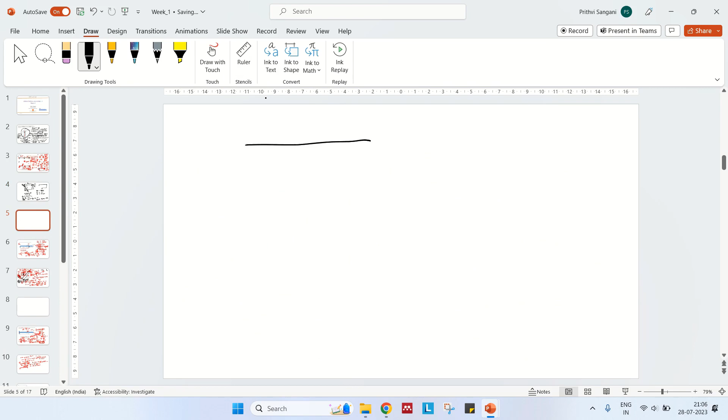Yeah, so when it comes to stability, let us just make a hinge here, and we have this, so here, and this is here. So now what happens is you draw the free body diagrams.

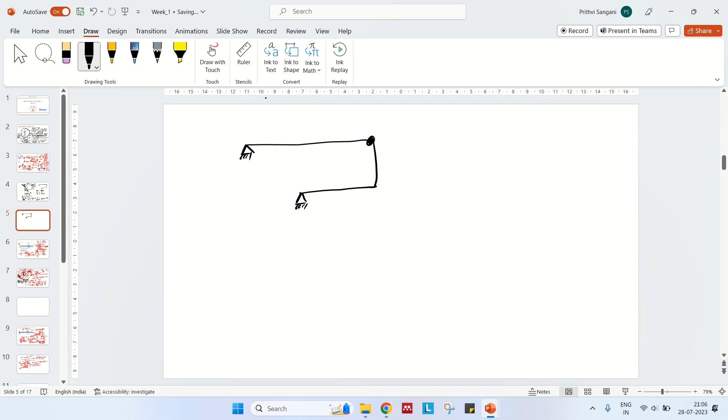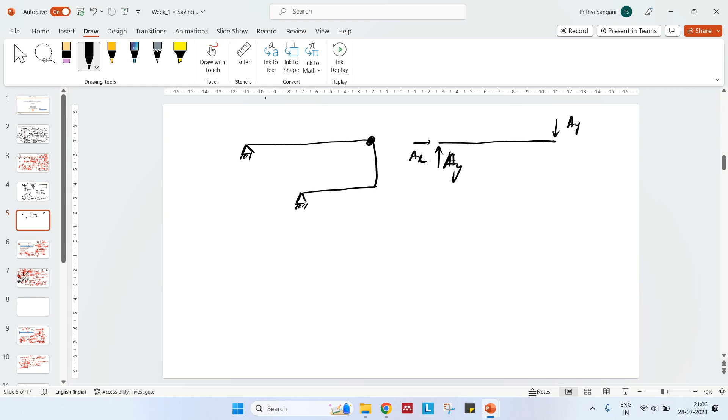You have Fx, sorry, this is Ay and this is Ax. You'll have Ay and Ax about this hinge, and the hinge will transfer the same thing, whatever is transferred to it. This is Ax, Ay, and this is Ax and this is Ay, and also you'll have some moment here, and you will also have a moment this way, and this is Ax and this is Ay, and this will be Bx and By.

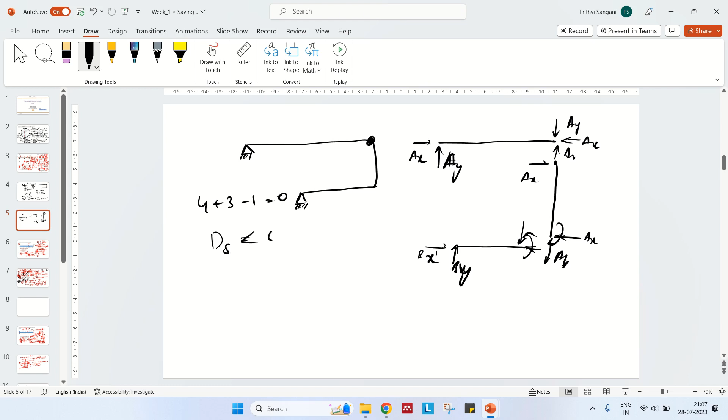So for example, if the system is a mechanism - that means if the system is unstable, usually you have an extra degree of freedom and an extra equation to solve it. Right now if you see 4 plus 3 minus 1, it is 0. Usually if the degree of static determinacy is less than 0, we call it an unstable system. But in this case DS is equal to 0, so it has to be a stable system.

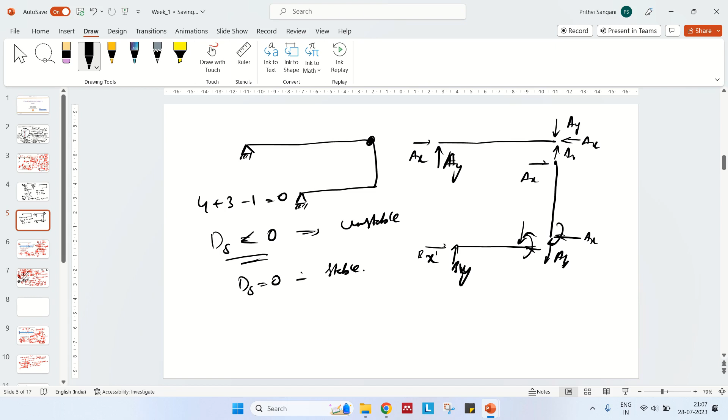So even though you have these moments, right - let me understand your doubt. Let us say you have this, for example this is a pin support. If you give some load here and everything is rotating, right, but the moment here is actually countering it, it is not allowing it to rotate. It's only transferring, so that is how the moment is being generated.

But in the other case, if you say this is something like this and you have something like this and you have a hinge here, then what happens - you just press this and it simply goes like this. That means it's forming a mechanism. This is completely an unstable system.

Yeah, in this case it is completely an unstable system, but here you have a rigid support which gives it an extra thing. And similarly, to answer your question, for example if you have a roller support here, then again it is unstable, because if you press this it simply moves, it will rotate here and just move in this direction.